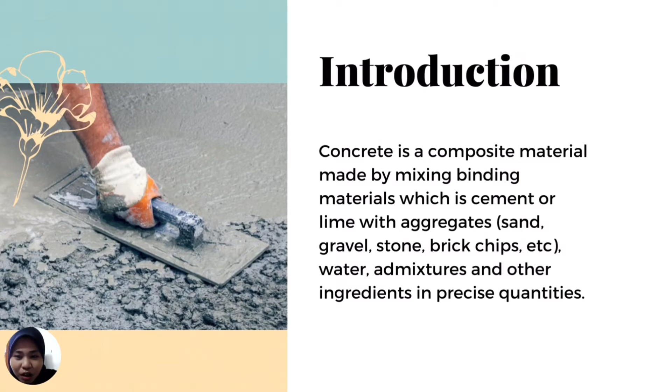The formula for producing concrete from its ingredients can be presented in this equation, which is concrete equals binding material plus fine and coarse aggregate plus water and admixture.

Concrete is the first choice of the civil engineering industry because it is the most commonly used material that is readily available and cheap, while it has some good properties such as excellent durability, moldability, and the ability to be produced with industrial byproducts while using less energy.

The main factors that affect the failure of the concrete structure are incorrect selection of materials, errors in design calculation and detailing, improper construction techniques, insufficient quality control and supervision, chemical attacks on the concrete structure, and lastly, external mechanical factors.

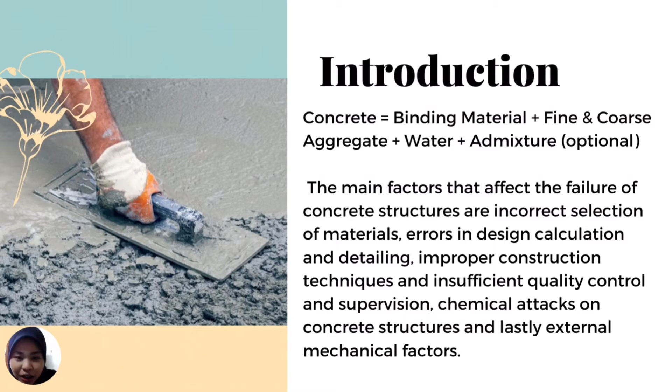Basically, this project is concerned with the cause of the concrete problems and how to prevent the concrete problems. Even though concrete can offer many benefits, nowadays it is not always perfect. Improper processes and maintenance, as well as the weather, can cause a few common concrete problems that can affect the durability. With the problems, they also have the solutions.

To achieve the outcomes of this project, we will focus on the methods of data collection that we use to receive the most suitable information for this study. So, we decided to conduct a survey through a questionnaire using an online platform, which is Google Form, and we will blast it to the community online.

We target for each team member to survey at least 8 respondents to obtain good results. This will make a sample size of around 40 respondents. The data is regarding the common problems faced in their concrete houses, and in this survey, we ask the location of the concrete problems and the type of concrete problem that they usually face, such as cracking, crazing, blistering, delamination, dusting,

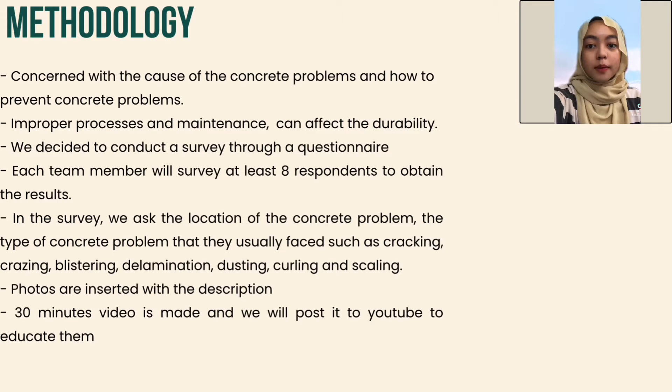curling, and scaling. We also insert photos with a description to help the respondents know what type of concrete problems they face. We use clear and simple language in order to keep the questions short. From the data collected, we will make a 30 minute video and post it to YouTube to educate them on the root cause of the problems and how to prevent them.

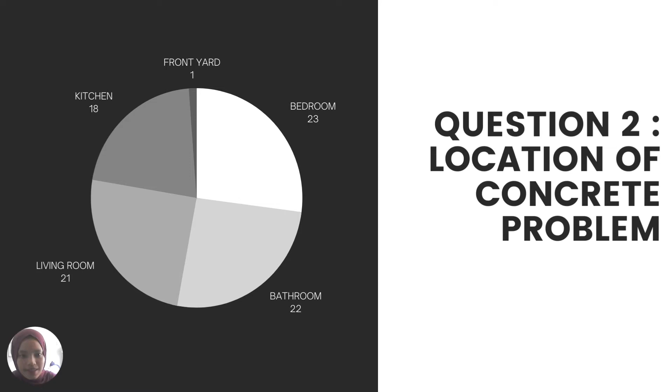The most chosen location for the concrete problem is bedroom, with 23 respondents that chose this location, followed by bathroom with 22, living room 21, kitchen 18, and the least selected location for this concrete problem is front yard, which is 1.

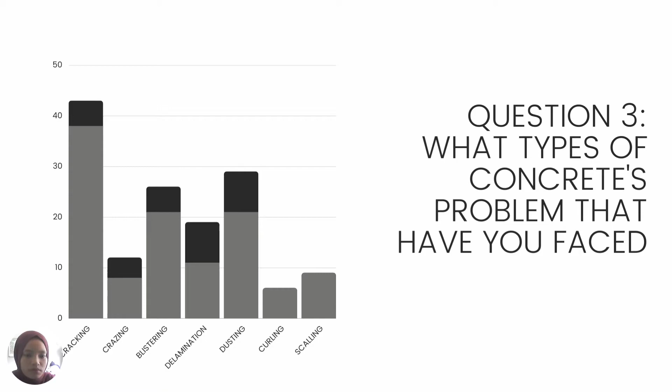The next part is the discussion. The first cause of concrete problems is cracking. The most common problem of concrete that communities face is cracking. Cracked concrete is usually visible as a sign of distress in concrete. Cracking occurs when deformation occurs in concrete due to a few factors such as uneven loads, freezing, and change in temperature. Cracks occur due to chemical reactions after hardening.

During hardening, a piece of concrete in the open air shrinks. It shrinks or contracts, so when placed, it fills a certain space, and then as it hardens, it gets a little bit smaller. This happens due to the evaporation of part of the water contained in the concrete. When shrinkage forces become greater than the strength of concrete, cracking will occur. Cracks in concrete will harm people and things surrounding them. They can grow over time, and concrete cracks are not attractive at all.

So, the main reasons for concrete cracks are as below. The first one is rapid drying of concrete. The concrete strength can be compromised and end up cracking if water evaporates too fast. Concrete becomes soft when it dries. It will be an unstable and weak state, which can lead to reduced compressive strength and durability. It is widely accepted that to cure correctly, concrete requires sufficient moisture, which can be added in a number of ways. The top of the concrete dries faster than the bottom due to hot weather, which leads to shrinkage at the top while the bottom does not.

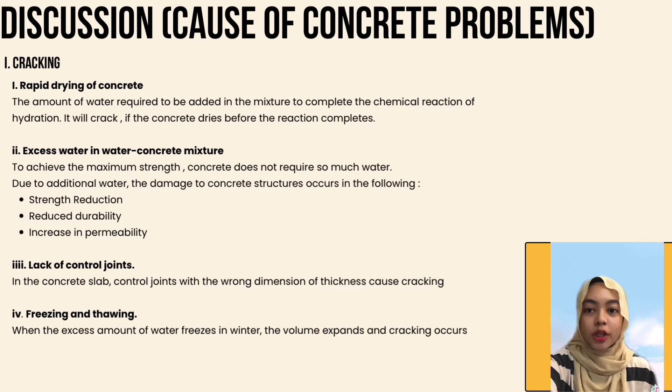The next part is the lack of control joints. In the concrete slab, control joints with the wrong dimension of thickness also cause cracking. And the last one is freezing and thawing. When the excess amount of water in the concrete freezes, the volume will expand and cracking will occur.

Okay, next, blistering. Blistering is the formation of hollow bumps of different sizes on the concrete surface due to trapped air under the finished concrete surface. When the surface becomes prematurely sealed as it dries, bleed water and bubbles of air get trapped. Concrete blisters are not easily repaired after the concrete hardens. Bubbles of entrapped air moving through the concrete are unable to escape the surface. It will result in hidden voids of air if the surface is sealed too early during finishing.

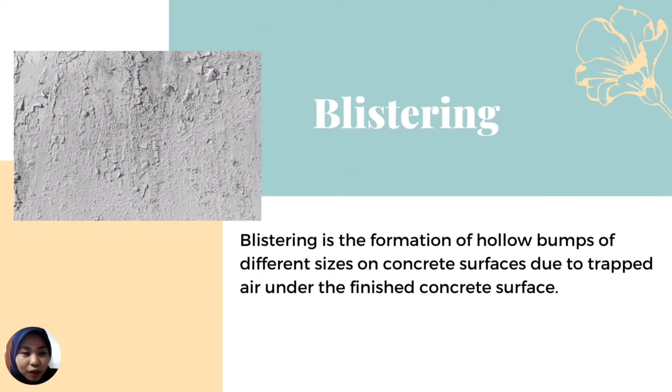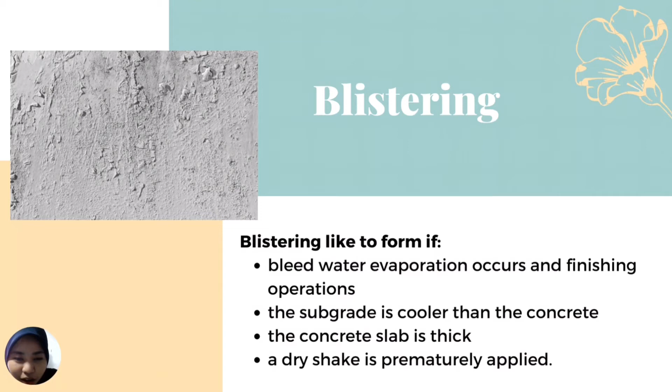After the concrete has cured, they will frequently break open under the weight of traffic. Blisters are likely to form if bleed water evaporation occurs during finishing operations, the subgrade is cooler than the concrete, the slab is thick, or a dry shake is prematurely applied.

My name is Fatima. I will continue with causes of concrete problems, which is dusting. Dusting is the formation of fine and loose powdered concrete on the hardened concrete by disintegration. When the hardened concrete moves, the powders are released. When the surface of the concrete is not strong enough, dust will occur, and a porous surface is weak and fragile, which in turn can lead to more dusting.

Concrete dusting is caused by a weak surface; it is powdering under traffic. The surface can even be scratched easily with a nail or something else. It comes from finishing while bleeding is going on, not letting the bleed water come through and trapping it. It happens due to the presence of excess amounts of water in concrete. Fine particles like cement will rise to the top and cause dust at the top of the surface.

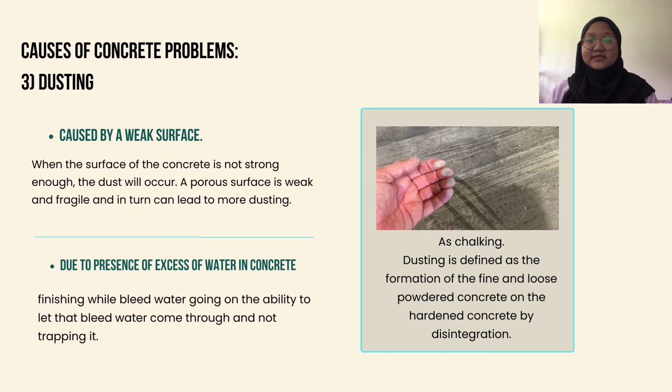We move into another cause of concrete problems, which is delamination. Delamination is similar to blistering. The top surface of concrete gets separated from the underlying concrete, creating an unbonded concrete layer between there and the slab body. The hardening of the top layer of concrete before the hardening of the underlying concrete will lead to delamination.

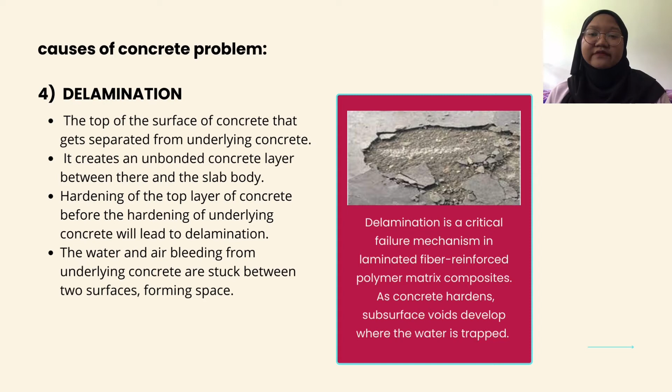Delamination is a critical failure mechanism in laminated fiber reinforced polymer matrix composites. As concrete hardens, subsurface voids develop where the water is trapped, and the water and air bleeding from the underlying concrete are stuck between two surfaces, forming a space. A separation along a plane parallel to a surface is also the definition of delamination, as in the separation of a coating from a substrate.

So we move into scaling. Scaling is defined as a general loss of surface mortar or mortar surrounding the coarse aggregate particles on a concrete surface. It is the peeling of a finished surface of hardened concrete as a result of exposure to cycles of freezing and thawing. It starts with a small patch and extends to larger areas and sizable patches if not repaired on time. So when concrete is saturated with water and temperature approaches freezing, air-entrained concrete contains millions of small air bubbles that accommodate the expanding water and ice.

There are a few causes of scaling. First, use of low strength concrete or a high water cement ratio, and then the use of little entrained air, which leads to a poor air void system in the hardened concrete, and then an improper finishing process and lack of adequate concrete protection after its placement.

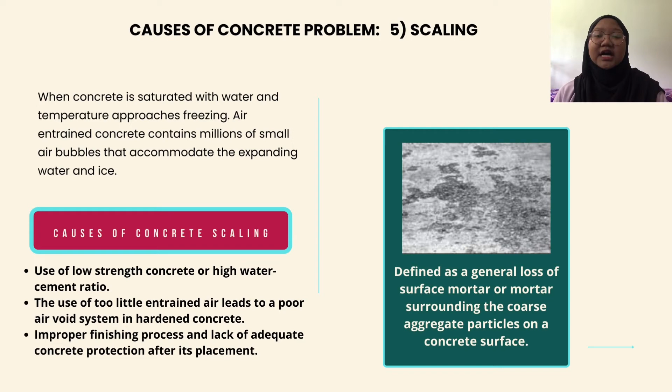Another cause of concrete problems is crazing. What is crazing? Crazing is the formation of closely spaced shallow cracks in an uneven manner, or the development of a network of fine random cracks. It is caused by shrinkage of the surface layer and rapid hardening of the top surface of concrete due to high temperatures. It is common when the surface is exposed to low humidity, sun, and high temperature. The irregular areas enclosed by the cracks are typically no more than 40 mm across and may be as small as 20 mm.

For the causes of concrete crazing, first, improper curing. It leads to reduced compressive strength development and increased drying shrinkage. Second, intermittent curing, which includes wet curing and drying. It allows the surface of concrete to dry for the time being and leads to concrete crazing. And the last one, inappropriate finishing, also called bad finishing. Inappropriate finishing means finishing while there is still bleed water on the surface, or a surface that has so much water on it.

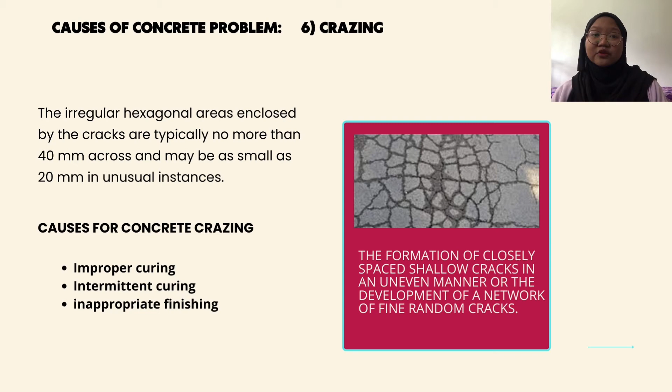The last point for causes of concrete problems is curling. Curling is the upward or downward bending of the edges of concrete. Curling usually begins on horizontal surfaces, warping on vertical surfaces. It is due to moisture and temperature differences from one surface to the next, causing thermal movement. The difference in temperature between the top and the bottom of the slab can cause curling. The top, exposed to the sun at high temperature, will expand relative to the cooler bottom, leading to downward curling of the edges. During the night the top cools and contracts, and a warmer subgrade will lead to upward curling.

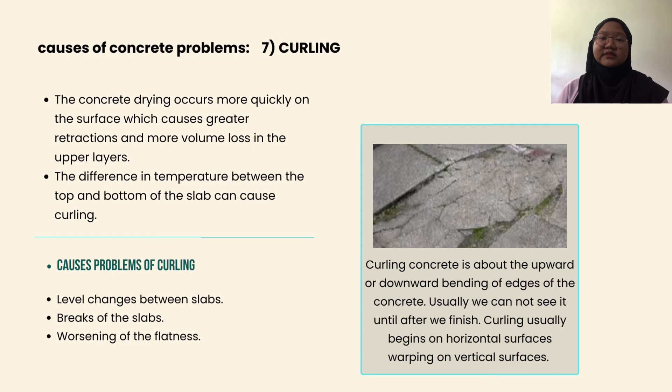There are a few problems caused by curling. First, level changes between slabs, which affect the passage of vehicles, especially with small and hard wheels. Second, breaks of the slab, which literally fly off the base of the pavement when loads are applied on the edges. And the last one is worsening of the flatness. It must be measured in the first hours or days after the execution. Later, curling can make the activity the floor was executed for limited or impossible.

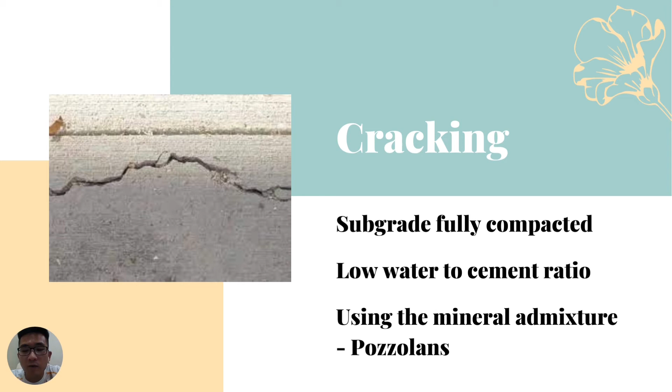The second problem is the crazing. The problem can be solved by doing the proper curing. The curing will prevent the loss of the moisture in the concrete and help in the hydration process of the concrete. Besides that, use workability enhancers and air-entrained concrete with a moderate slump.

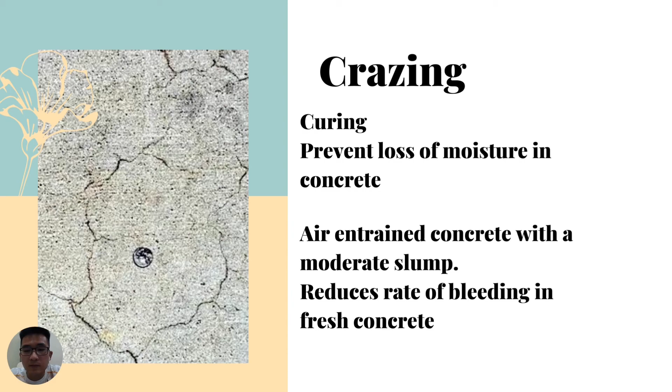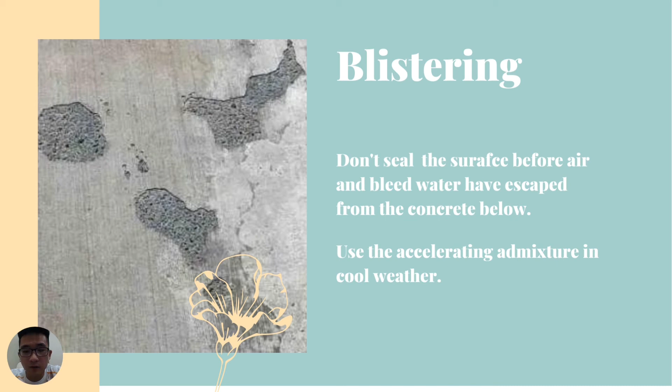The next one is the blistering problem. To prevent blistering on the concrete, do not seal the surface before air and bleed water have escaped from the concrete below. In cool weather, we use an accelerating admixture or heating the concrete to prevent the blister formation and promote even setting throughout the slab depth.

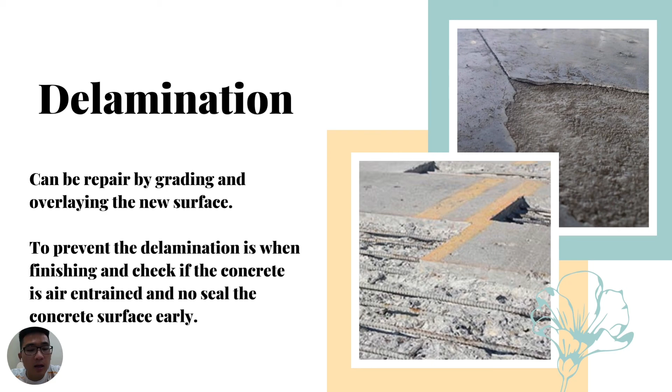Other than that is the delamination problem. A delaminated surface can be repaired by patching after the surface layer is removed and the underlying concrete is properly cleaned. The way to prevent the delamination is, when finishing, checking if the concrete is air-entrained and not sealing the concrete surface early.

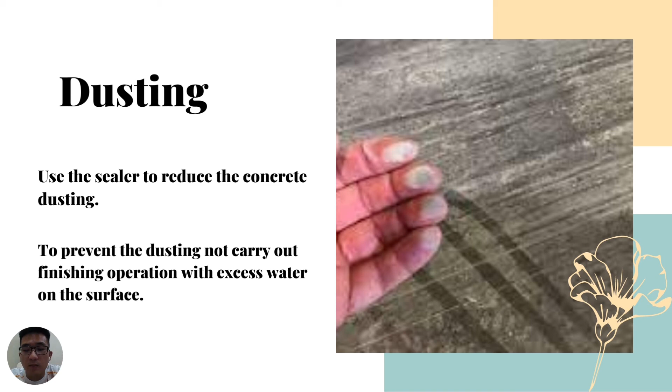The next problem we are facing is the dusting. The most common way to reduce concrete dusting is using a sealer. Sealers are easy to apply, cost-effective, and will not change the look, color, or surface characteristics of the concrete. Besides that, to prevent the dusting, do not carry out the finishing operation with excess water on the surface and provide effective curing.

The next problem we are facing is the scaling. The way to prevent scaling concrete is to design the concrete mix properly, use the appropriate water cement ratio, and well-graded aggregate. Other than that, prevent the addition of water when the concrete is troweling or floating.

One of the important ways is cleaning the concrete slab surface and applying a suitable waterproofing system. In addition, prevent vibrating screeds for high slump concrete as it creates a weak layer at the concrete surface.

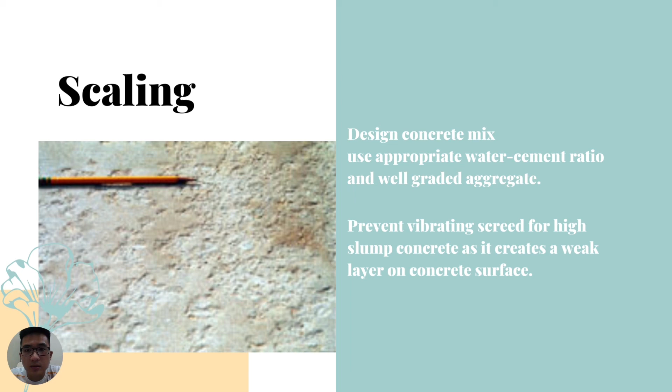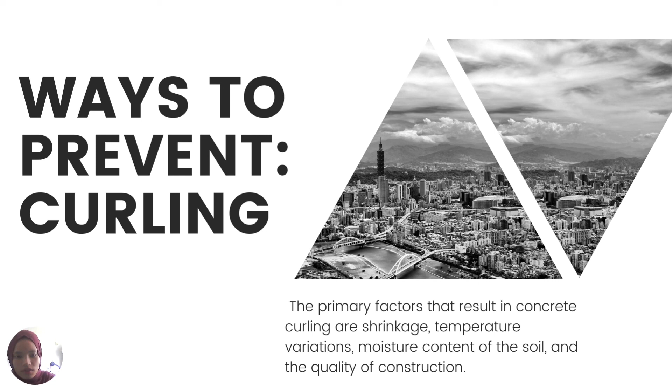So ways to prevent the concrete problem of curling. The primary factors that result in concrete curling are shrinkage, temperature variation, moisture content of the soil, and also the quality of the construction. There are four critical practices to prevent this concrete problem, which is curling.

The first one, prevent drying shrinkage, which can be prevented by using the lowest effective water content for the concrete mix and by using the largest possible size coarse aggregate. The second critical practice is thickness of the concrete slab, and it is recommended to design a thicker slab to prevent the curling. If not, provide an increased thickness at the edges.

The third one is prevent the bleeding. All preventative measures to avoid excessive bleeding need to be practiced in the construction. Bleeding also can be avoided by placing the concrete on a surface that is damp or absorptive. And this will also prevent the bleed water from coming to the top of the concrete.

And the last critical practice to prevent the curling concrete problem is proper steel reinforcement. When properly designed and placed, steel reinforcement will help to prevent the curling to some extent. Any load transferring devices used to prevent the vertical movement are placed across the direction of construction joints.

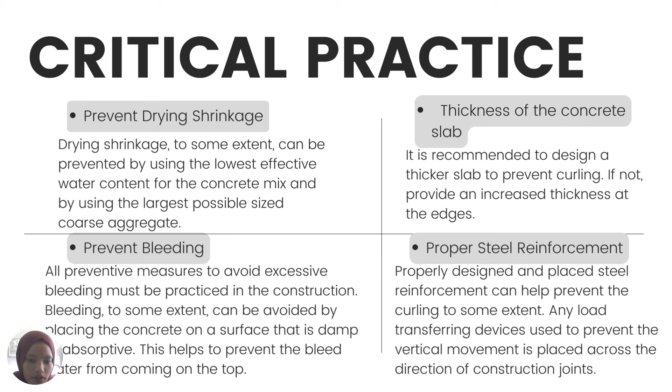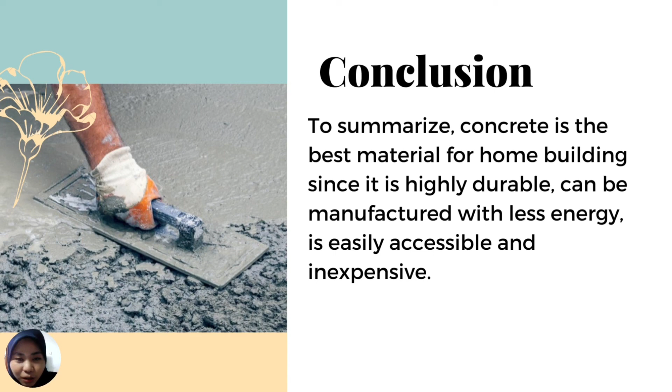To summarize, concrete is the best material for home building since it's highly durable, can be manufactured with less energy, is easily accessible and inexpensive. However, concrete will degrade with time if homeowners are unaware of the factors that affect the failure of concrete structures. It will cause concrete problems such as cracking, blistering, dusting, delamination, scaling, crazing, and curling.

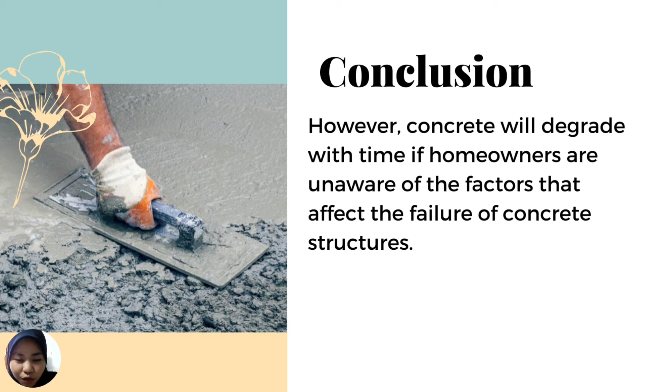As a result, it is important for everyone to understand the scope of the problem and how to prevent or solve it. Thank you.